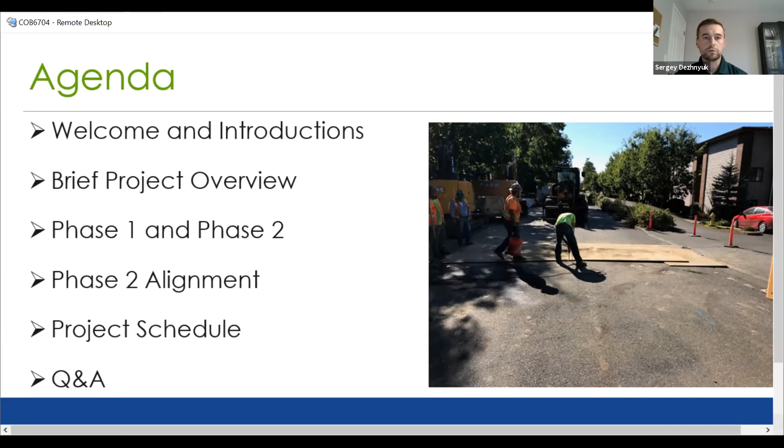This entire project, as many of you are aware, used to be one big project, one CIP, and then several months back we split it up into 2 phases. It consists of replacing the 15-inch existing sewer pipe with 18-inch primarily, and then 21-inch sewer pipe. This pipe upsize will provide additional flow capacity, operation access, and reliability.

The Erickson trunk sewer main will be upsized to accommodate the necessary flows. There's a lot of flow in this 15-inch pipe that at times travels at the full level. One big thing about this trunk sewer is that the new alignment will remove the trunk sewer from the creek area and improve maintenance. This is particularly in the Central Park condos property.

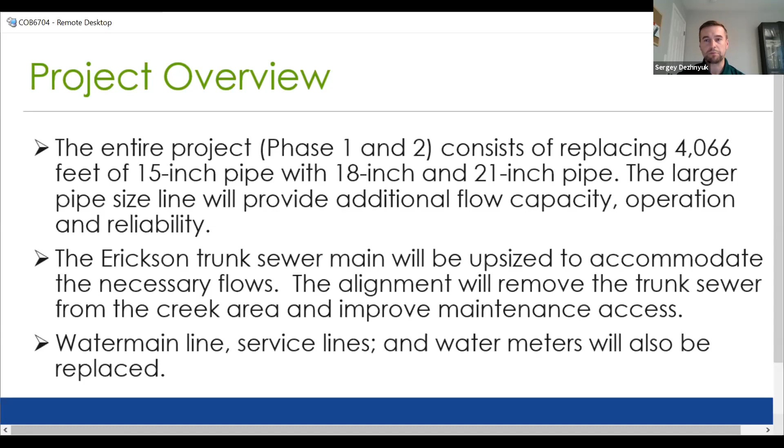This overall project also includes water mains to be upgraded, service lines, water meters, and all those items. So that's the general overview. I will go into detail about Phase 1 and Phase 2, but this is essentially what we're looking at.

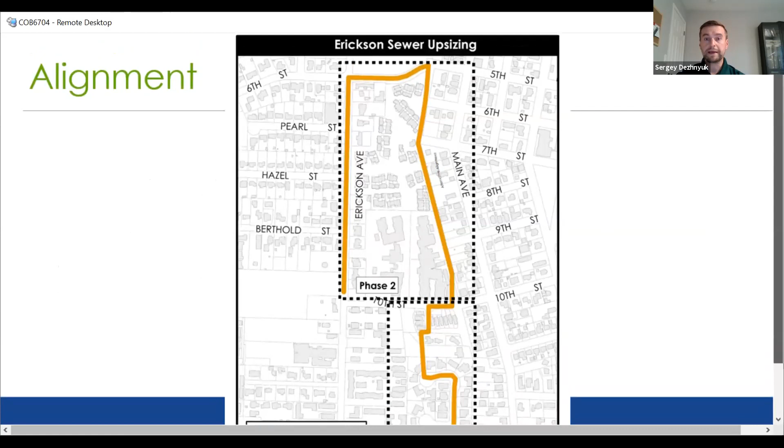Here is the layout of the 2 phases. You have Phase 1 and Phase 2. Phase 1 is actually the south piece, and sewer flows this way. This is just the general area—by no means is this the exact location of the sewer and water work, but it gives you the project scope of the area.

From Allen, there's Dale right here, and then there will be some work here in Allen. We're currently under construction for phase 1. We have already installed sewer pipe from 10th Street into Stott, through the properties into Taralynn, and then down Taralynn. We're right around here now, so it's moving fairly successfully. There's a lot of work involved. The contractor, Emery and Sons, is doing a great job.

And then phase 2 is this portion here. We have the Beaverton Lodge, we have the pedestrian pathway that kind of travels right there, and then Central Park condos are in this area. There will also be water work here, but I'll go on to the next slide and we'll get some more information.

For phase 1, which we're currently working on, from 10th Street down to Allen Boulevard, roughly just under 1,600 lineal feet of sewer construction, and that was from Dale Allen up to 10th Street. And then approximately 930 lineal feet of waterline construction in Taralynn Avenue. Construction began this summer in August, and the estimate is to be completed late fall, early winter.

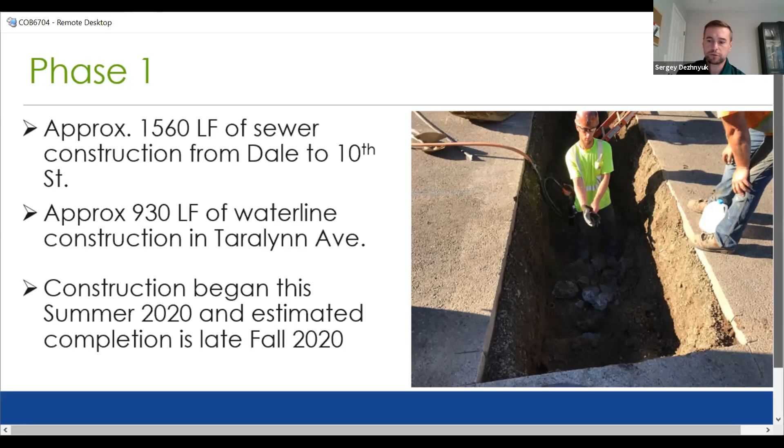Some reasons why we wanted to split up the two phases: the waterline condition in Taralynn Avenue. I'll go right back up to the previous slide. Here is Taralynn Avenue. The waterline condition was very poor, and it was already postponed a couple years due to other unforeseen circumstances. So we really needed to speed up and replace the water line for this neighborhood.

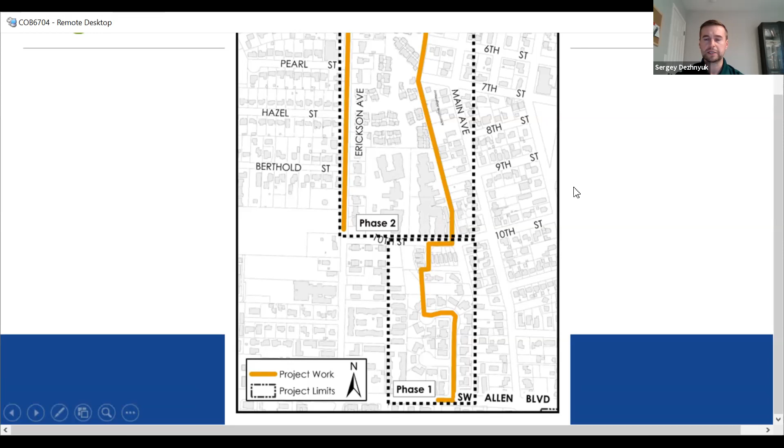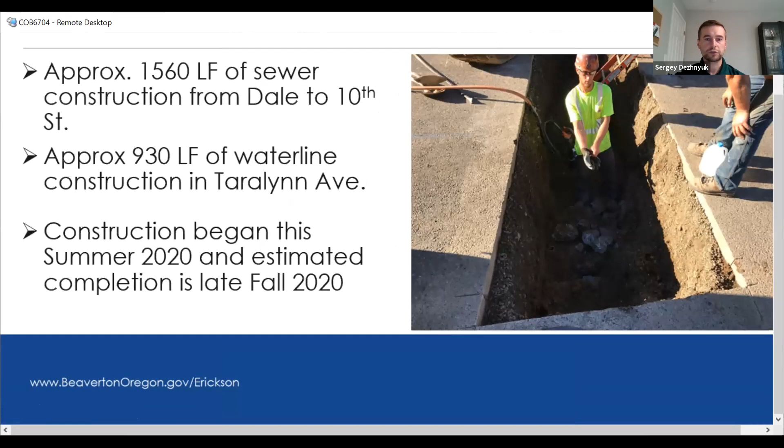So we went ahead and split up the main sewer project into two phases, so we could start with phase 1, include the water work, and then figure out the exact alignment of phase 2. We needed to obtain additional easements, and other work was necessary. So that was the reason to split up the two phases, and construction's coming along good. We'll go on to the next slide here.

For phase 2, this phase will involve both sewer and waterline construction from 10th Street up to 5th and Erickson Avenue. Primarily, the sewer will run through Beaverton Lodge, the condos, 5th Street, and then there will be a repavement of the pedestrian pathway between Beaverton Lodge, Central condos, and then the houses. There's a pedestrian walkway, and we'll show you some photos of that as well.

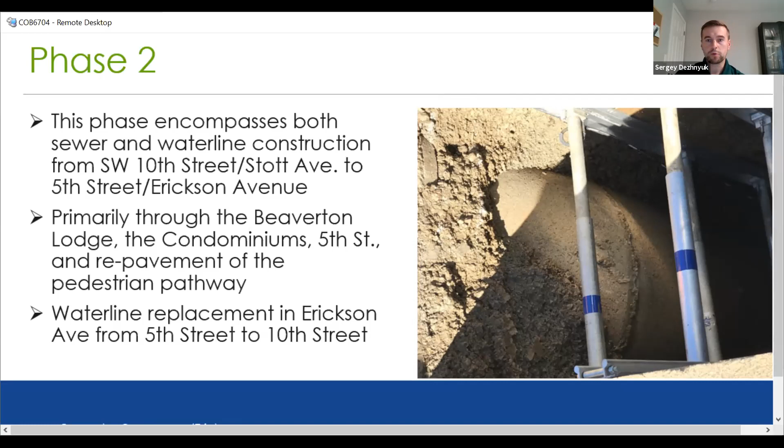As well, a big portion is waterline replacement in Erickson Avenue. Once again, the water system is in poor condition there. A couple of bigger scale things I'd like to mention - I'll go back to this general slide so you can look at the general area. Some things I think would be important to note: there's approximately 4,000 lineal feet of total sewer replacement, for both phases, and the existing pipe we mentioned was undersized.

Who's paying for it? That's an important piece. It's actually funded by Clean Water Services, since it is a trunk sewer, and the City of Beaverton is the managing agency for this project. The total cost will be in the realm of $4+ million. Phase 1 was $1.4 million, and that included both the sewer and water work. So phase 1 right here was $1.4 million, and this estimate would be around $3 million for both the sewer work and the water work down here.

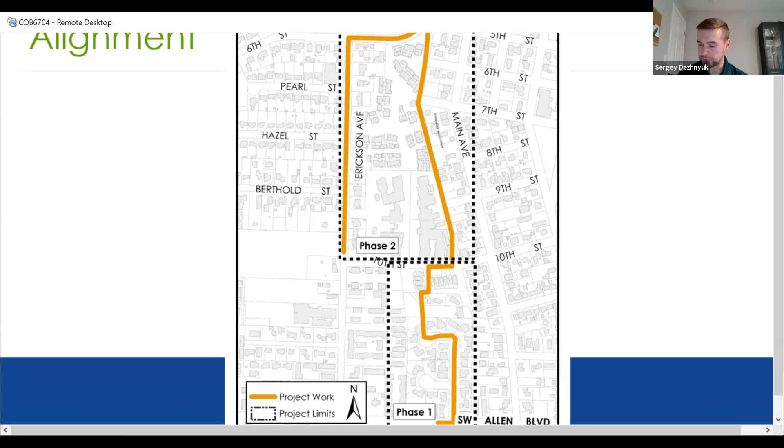With that, as I mentioned, there will be repavement of the pathway, and any ADA ramps that need to be corrected and improved upon. So with that, here's another map - came out a little blurry, but I think you can see the general idea. Here's 10th Street, and this is the approximate area.

So right now what we're going to do is really focus on phase 2, and we want to walk through where the 60% alignment is proposed. So there's 10th Street right here, and we have some more photos, but it'll run through Beaverton Lodge parking - that's this stretch right here - and then it'll go through the Central Park condos paved parking area, drive aisle. There's a few other sewer main pieces in the thinner red color.

And why we're showing this is, you know, we understand this is a really valued walkway here, the pedestrian pathway. We wanted to work with neighboring property owners and get any input and really share what we're doing, because we're definitely trying to do what we can to minimize any tree removal. And we'll walk through the specifics of what is proposed.

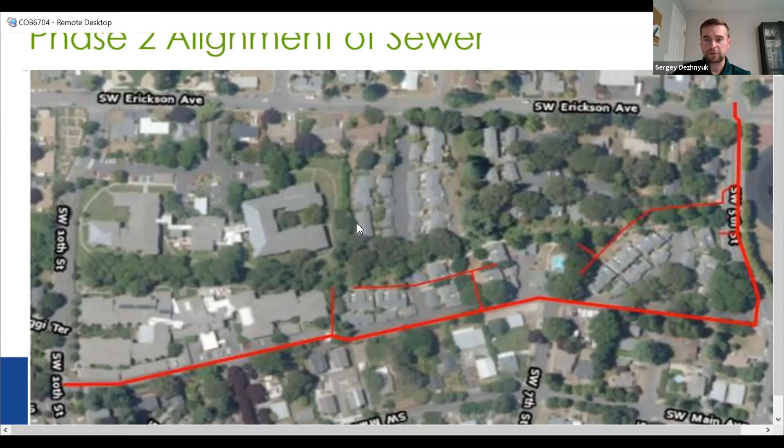So here's a map. What about the trees?

So just to familiarize ourselves with the area, we have 10th Street down here. Beaverton Lodge retirement community is right here. We have the Central Parks, 5th Street right here. And then we have the pedestrian pathway right here. Due to scale, it's hard to see everything and the trees, but the pathway is more like right here.

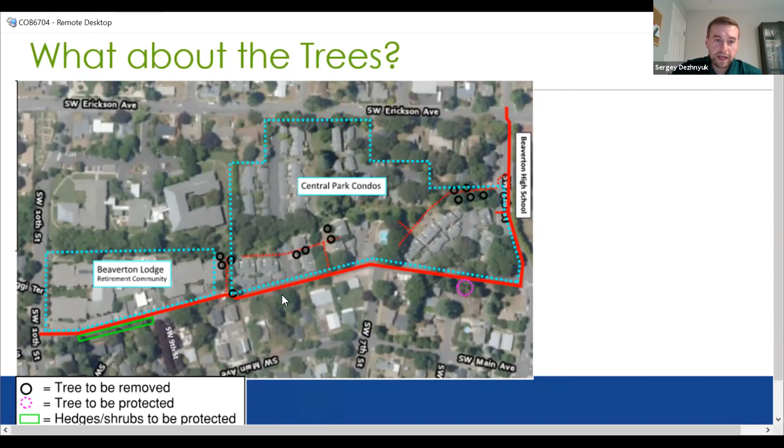So the plan is, and I'll show you, there's a little legend here. Trees to be removed, the black circles are ones proposed to be removed. I wanted to highlight that the only trees we are even considering moving, or that really need to move, are the ones directly in line with the sewer alignment. We are trying to minimize that as much as possible. Some of them, there's just no way around because they were planted either directly over an existing sewer line or right next to a manhole. Per the easements that we have, any object installed above a sewer line is in the way if the city ever needs to go back and do any work.

There's a hedge down here, like a shrubbery growing, that we are going to do what we can to protect. The plan is to do a pipe burst from 10th Street and then through Beaverton Lodge. That way we can avoid removing unnecessary tree and hedge. The red here is the sewer line, just to give you an understanding of what's where. Then we'll go on to the next slide. We may have to come back to this a few times.

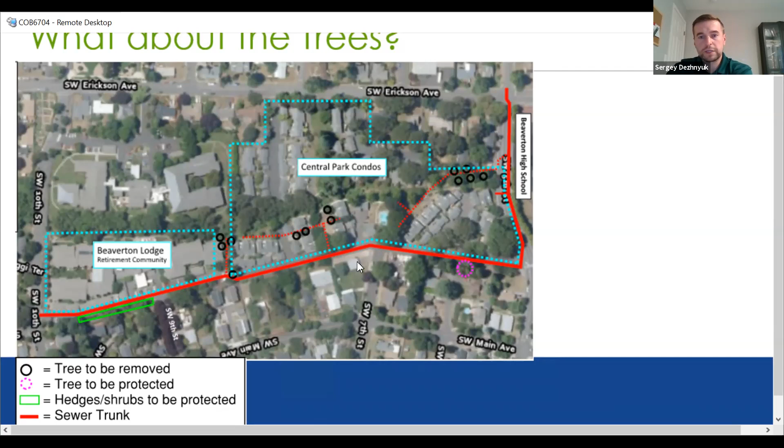So here's looking at the project north or south to north. North is true north and south is here. This is the northern section, and this one is more south as the Beaverton Lodge is further south. This is just another way to look at it with the same information that we saw.

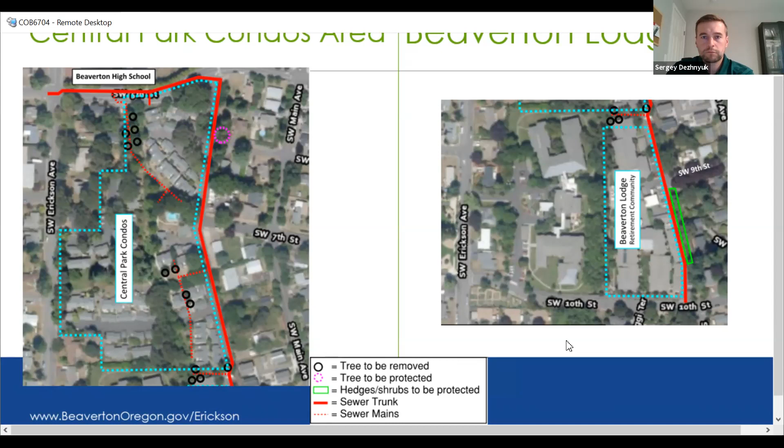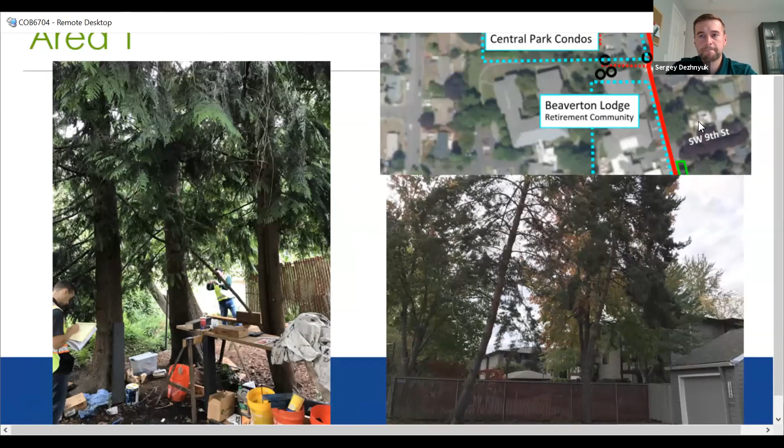So I'll go ahead and, can everybody see the screen well, Stacy? Is the entire slide showing? Yes. Okay, thank you. Yeah, it is. Sorry, I was giving you a thumbs up, but you couldn't see that. Thank you, I'm sorry about that.

So just to give an idea of what we're looking at, the first trees proposed to be removed are the ones between really Central Parks and Beaverton Lodge. This is just to give you guys an idea of what is involved. There's an existing manhole right about here where there's the Home Depot bucket. For those who have experience with construction, there's really no way that we can remove a manhole and do the construction without removing the trees. So these 3 trees on the property of Beaverton Lodge will have to come out.

With me mentioning that, I do want to say that with every tree removal we have, there will be a new tree plan proposed where the city would look at new locations on the property or nearby properties that we can replant the trees. It's a general rule of thumb from the planning department: 1 inch for 1 inch. So if it's a 10-inch tree, there would likely be 5 2-inch caliper trees planted. So that's just something I wanted to mention.

We're definitely, the only thing we would even consider moving is if it's directly in line of the construction of the project. But this location here are the 3 trees on the edge of Beaverton Lodge, between Beaverton Lodge and Central Parks. So this is the photo. This next photo down here is the fence. There's a fence line right here between Beaverton Lodge and Central Parks.

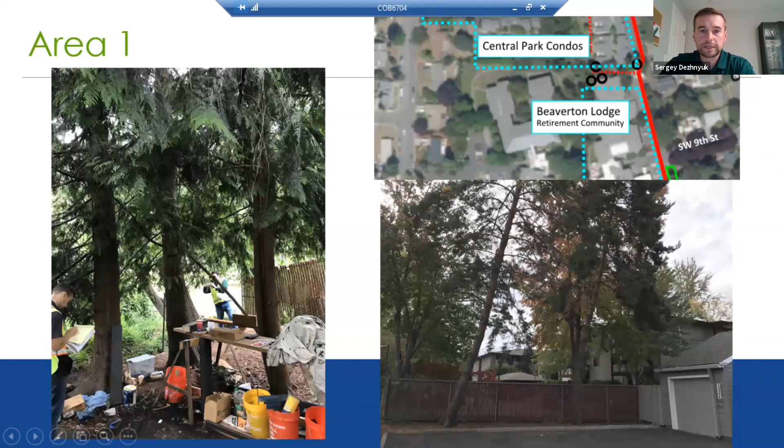So then the next slide, as we move down Central Park condos, there's 2 trees down here and then 2 over here. As we're going to be taking the sewer down, the sewer goes directly here under the trees. So these 2 trees will need to come out, and then for putting in a new manhole, 2 more trees will need to be removed, between these buildings at the Central Parks.

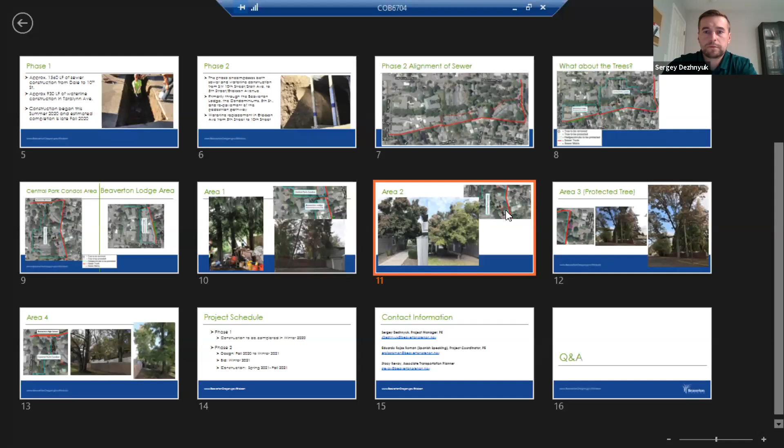One example we wanted to show is a tree we're actually going to totally bypass by boring under it. This is considered a significant grove in the city of Beaverton. What we're planning to do, shown here in magenta, is a pipe boring construction method where we'll go from right around here down and bore under, then continue on to the manhole on the other side.

The diagram we have of the sewer is approximate, so it's not quite where the sewer is going to go, but we're up to here. We're going to go through the drive aisle, then have a manhole, and bore under to avoid any of the roots. So we want to protect this big tree right there.

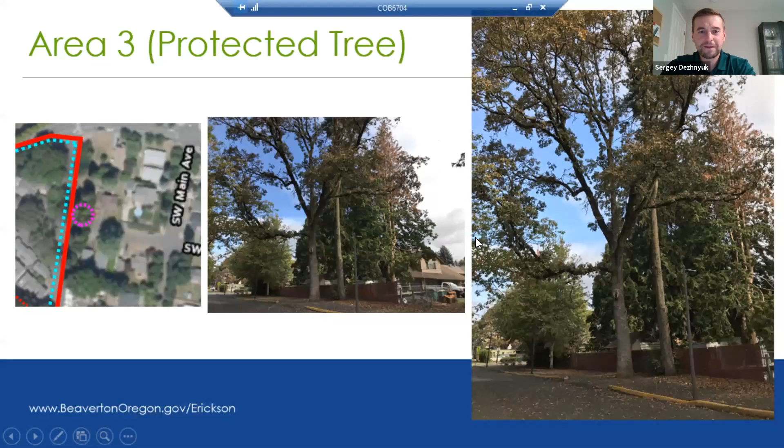I don't have the list in front of me of all the tree names, so my apologies. I'd rather not guess all of the names of the trees that we looked at. Next slide.

The other trees that will need to be removed are on the west side of the Central Park Condo Association. This is roughly where the creek is, and we're going to be running a smaller main line through there to serve some of the properties that won't be able to be served by the new trunk line location along the drive aisle near the pathway. So some of the services still need to go through here.

The 60% design will require some of these trees to be removed just for construction purposes, and once again we will be replanting accordingly. Potentially these two here are really three trees in one, and there are a couple more that may need to be removed depending on what we decide to do in construction. So that kind of summarizes in a nutshell the main trees looking to be removed.

Roughly 5 trees on the west side of the condos. The trees that we showed, I think there's about 13 total. These are right now at the 60% design. I wanted to mention that, and if there are any changes or anything unusual, we will try to communicate that to the best of our ability. I just wanted to show the nature of where the sewer alignment is, and the necessity to remove some trees in order to do construction.

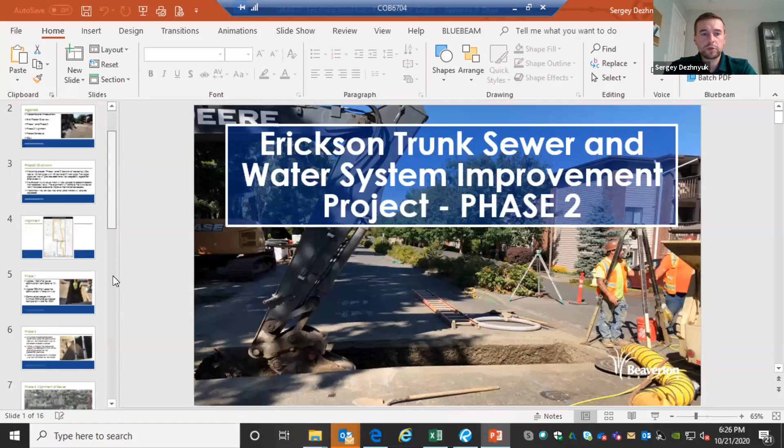I appreciate all of your attention and patience as we are going through the design, and even as we've been working in the area. I know traffic control has caused a lot of inconveniences. Contractors have been doing the best they can to move traffic through and keep it all in order, but we'll go ahead and open it up for questions. I also want to ask for your patience as we're navigating through this, since we haven't done too many of these live meetings, so we will do our best to hear you.

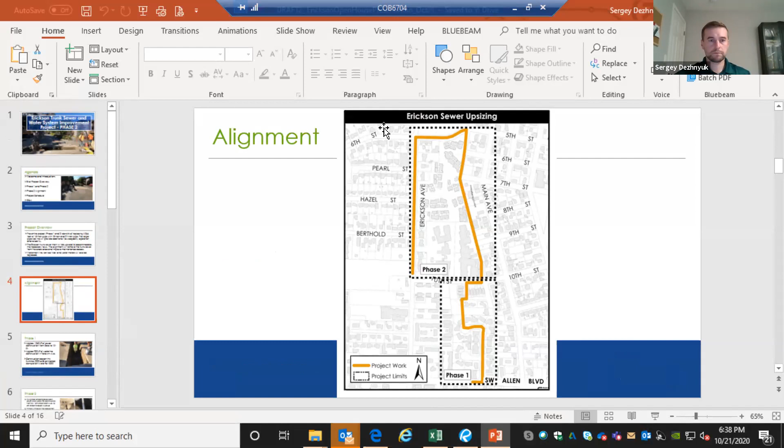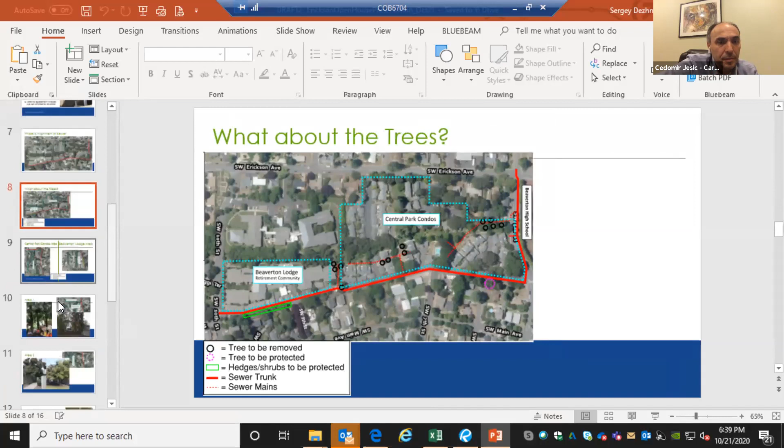I think this is, Sergey, that's the area off the 5th, I believe. I can try to open it up again. But I believe that area would be open trenching. About this one right here? Yeah, I don't know, you have to go look for a slide. Where's the... you have those blow-ups down below. I think it's area 4, or you're removing trees. Keep going down. Keep going, the last one. This one, right here?

Yeah, so the question again is regarding Area 4. At this point in the design, do you have an idea what type of construction will be used to install the new sewer line on the west side of the creek, i.e. horizontal boring versus excavation? The west side of the creek is going to be open trenching. Well, both sides will be open trenching. The only area we're going to bore is underneath the creek to eliminate any permitting needs with the agencies.

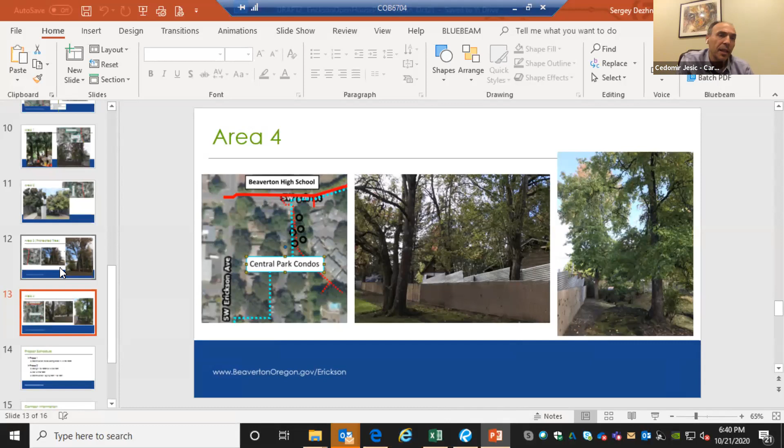The reason being is we're having to adjust the grade of the line, and with that, we're having to lay a new line on a different grade. And we cannot accomplish that with boring. I mean, we could, but it's going to be very expensive.

Okay, are there any other questions? I don't have any other open questions at this time, but maybe we'll give folks just a second in case they do. Is there anything, Eduardo, Sergey, or Cedomir that you'd like to add while we're waiting, just in case there's a few more questions coming? These are all great, by the way.

Have all the necessary easements for phase 2 been established? They're in the process of being worked on. So they have not been signed yet by the property owners, but we have a verbal agreement for the locations that we had asked for from the respective properties. That's a great question, and that's really why we had peeled back without doing too much design work. So the next steps from the city are to obtain those easements so we can spend more time on the design.